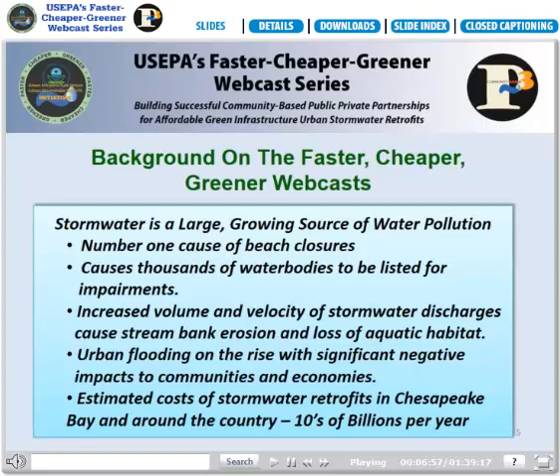Urban flooding — as we thaw out here in the Northeast, it's the first thing that comes to mind, the flooding that we can expect with this spring. It is on the rise with significant negative impacts, as many of us know, to communities and economies. And, of course, the estimated costs of stormwater retrofits in the Chesapeake Bay alone, here in the Mid-Atlantic, and around the country, we know to be in the tens of billions of dollars per year.

But let's flip that problem around and look at it as the growing industry and opportunity that it presents for us from an economic standpoint. This problem, as we're seeing in cities like Philadelphia that have adopted these approaches, is driving new green solutions and, in fact, a growing green market.

Traditional approaches for treating stormwater runoff have not worked. They've essentially created the challenges we have today, or haven't been able to address the emerging problems. Growing local mandates for governments to accelerate implementation of stormwater control measures are happening across the country. Many communities are opting for more affordable green infrastructure practices designed to not only treat and prevent stormwater runoff pollution, but also assist with mitigating floods, addressing water demand, and mitigating urban heat island impacts, which gets into public health and climate, focus on resilient communities, and providing other multiple community benefits.

This leads us to why EPA and many of our partners have begun to look at an area that, I must mention, public-private partnerships have been around. Actually, they've been around before the 'people, planet, profit' idea. Someone commented on a last webcast, 'hey, why'd you guys pick P3?' It's already out there. They've actually been around for quite some time.

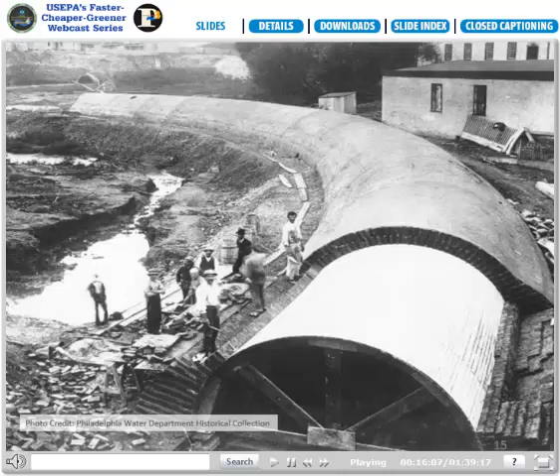This is how we did it. To the left of these men, with the new sewer going in in 1877, is the Mill Creek. As you can see, there's not much flow in there, because there's not much flow needed for this great big sewer except when it rains. When it rains, this thing fills up real quick, and that's when we have our problems. In the past it wasn't a problem because it just discharged to the river, and no one really cared about that at the time.

Today we really care. We recognize that we're having overflows from every one of our combined sewers, and we're looking to minimize that and put an end to it. In order to do that, we have to deal with an awful lot of water.

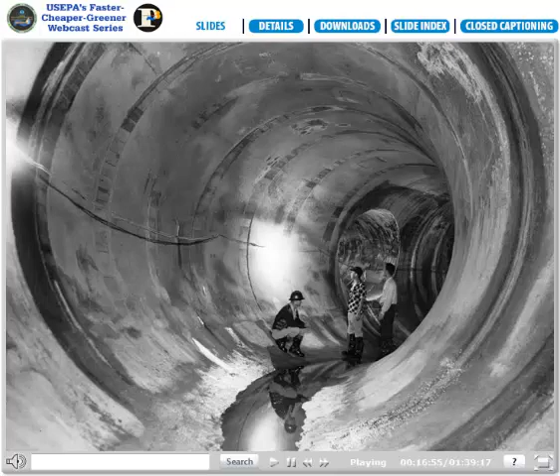This is an interceptor sewer that captures all the sanitary waste from our sewers and brings it to our wastewater treatment plants for treatment. However, when it rains, we have too much water and it goes out our outfalls. This is our largest outfall, called T14, well named. People are standing there because it's not raining, so it's dry, and all the flow is going to the wastewater treatment plant. When it rains, this thing can fill up about two-thirds to three-quarters of the way full pretty quickly, which gives you an idea of how much water we're talking about. This is our largest, but we have 164 of these CSO overflow points in our city.

This is a picture of South Philadelphia. Not the entire city looks like this, but it gives you an idea of the amount of infrastructure we're dealing with, and the amount of buildings and impervious cover we have in our city.

It's interesting to note that over the last 200 years, every square foot of this city, as it was built, and much of it today as it is being built, is designed on a slope, to allow rainwater to get to a storm inlet as quickly as possible. That's true for our roofs, our roof leaders, our sidewalks, our backyards, our streets. Everything is designed to bring water away from people, away from nature, into a sewer, and out into our river as quickly as possible.

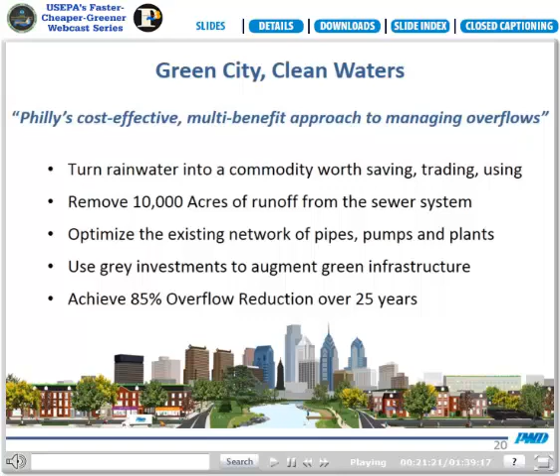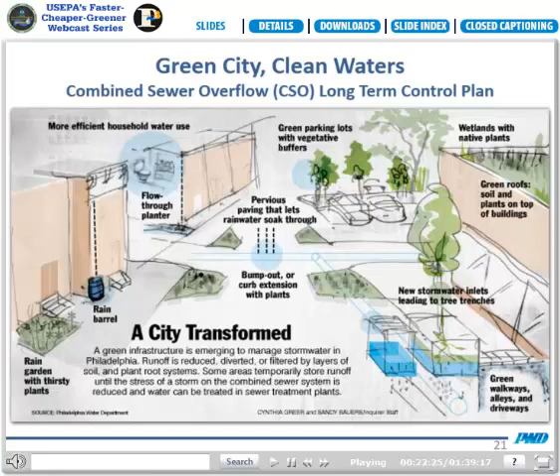What we recognize is that as Philadelphia grows into the future and becomes a more sustainable city, that only benefits the water utility. Anything the water utility can do to support the city in bringing in additional middle-class people and jobs, increasing property value and making it a better place to live, that only helps our bottom line here in Philadelphia, because we're spending close to $1 billion a year on capital and O&M. In order for us to sustain that into the future, we need a city that can afford its water utility. To do that, we're looking at working together to make Philadelphia a beautiful city.

So we need 10,000 acres. Where do we look? Well, we use the concept of One Water, One City, Many Places. We look at every square foot of the city of Philadelphia - the neighborhoods and communities, the transit systems and roadways, rivers and streams, parks, schools, streets, businesses, parking lots, universities. Most of the time we just put the word green in front of those words, and then we have a program - a Green Streets program, Green Schools program. We're working in all these different areas in order to create momentum, create energy, create designs that work and are affordable to manage our 10,000 acres.

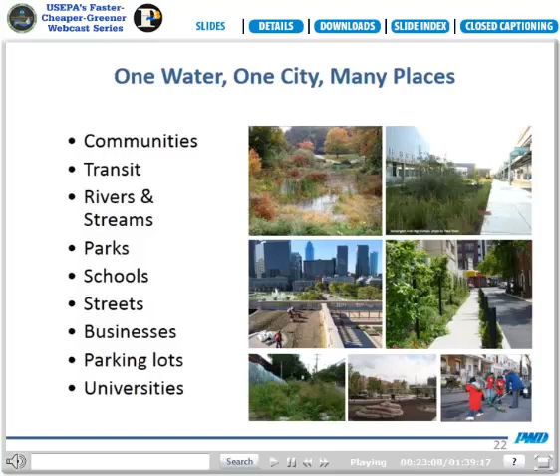This work largely came out of our long-term control plan for our combined sewer overflow. We've been working on that since the 90s, and in the early years of the 2000s we were working closely with EPA and the state to understand how we could convert a CSO long-term control program into a green program - sort of what you're seeing today. The way we found we were able to do it is we partnered - with groups like NRDC, Sierra Club, and Clean Water Action, and we worked with other foundations and other groups with the state and EPA, really trying to figure out how we could do this.

How can you convert a city? How could you basically change the slope of a city, and do it in a way that's fast enough and large enough that it makes a difference and achieves the goals that you're trying to achieve.

We began in 2011 with a consent order and agreement with the state, and followed that a year later with a landmark partnership agreement and administrative order with the USEPA to do the program that we're showing you today.

This is really the base of everything. This is removing 10,000 acres of runoff from the sewer system. We call an acre that's removed a greened acre. A greened acre is equal to basically 1 acre of impervious cover, capturing the first 1-inch storm from that. We call that a greened acre.

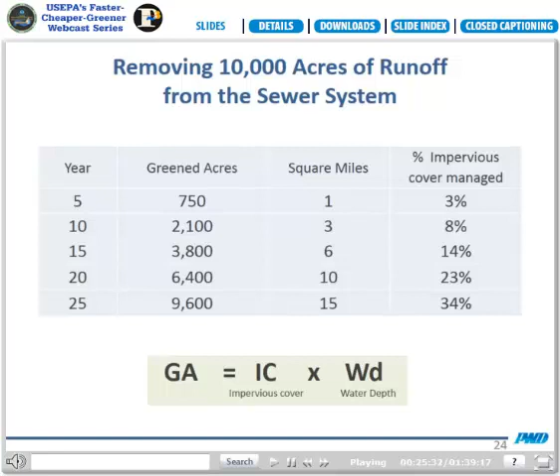But basically, what we're finding, and it's right now right at the top of our list, is the issue of extreme weather and climate change, where we don't know whether what we're witnessing is actual climate change at this point in time in Philadelphia. But I can tell you one thing: it's certainly extreme weather. Having the green infrastructure and the resilience from green infrastructure is really beneficial to our overall program for storm flood relief, for combined sewer overflows, for MS4 management, and for basically managing all our water systems in Philadelphia.

We're also obviously looking towards providing green open space and advancing livability and the public health of our city, increasing the market values and attractiveness of our neighborhoods, and reducing stream pollutant loads, which of course is the bottom line here of why we're in this in the first place, and creating this local green economy.

I'll talk a little bit more about that later. We're supporting urban renewal, enhancing the infrastructure network, and I can't underline enough how important that is—the importance of the existing infrastructure and maintaining that system and building on that system, and advancing the overall citywide sustainability programs, not only advancing them but also coordinating with them.

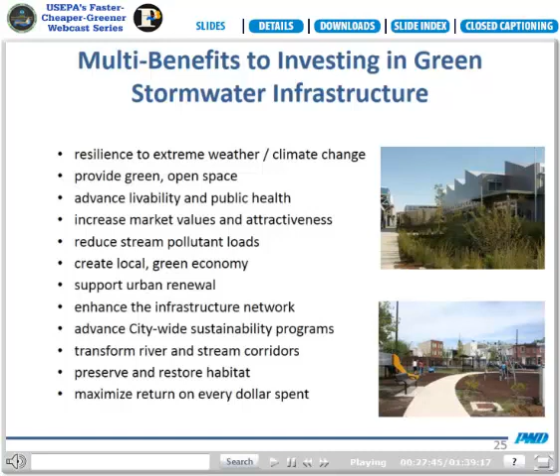Okay, we're now going to talk a little bit about the different financing opportunities. You can take a quick peek of where we're headed in this presentation. I'm going to talk about the traditional financing, and then I'm going to turn it over to Erin to talk about some of the other programs that we have.

Basically, traditional financing for green infrastructure is using our public investment, but using it above ground instead of below ground. We like to think about taking the $1 billion of sewer tunnel costs and bringing that to the surface and managing the same type of capacity, but doing it in a way that also benefits the city.

We're in this mode now. We're in the early years, about 2.5 years into our program, and we're innovating and demonstrating on public lands and streets, and we're setting aside money for 40 years worth of maintenance costs, looking to partner with other parties to do that maintenance.

We're looking again, for the traditional financing for green infrastructure, at the traditional funding sources using our revenue bonds, operating funds, working capital, and state revolving funds. We're also looking, and this gets to be really important here, at this public leveraging of sites, projects, and funds, and coordinating and integrating capital programs.

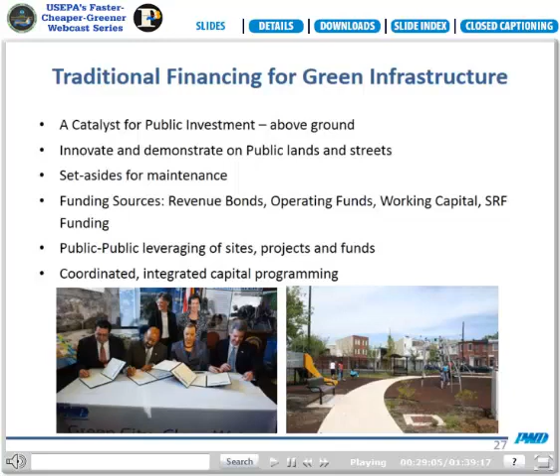I'm going to step through that a little bit closer because I can't tell you how important that piece is. What we find is that if you go out on Market Street and you do a design to green the street, the cost is pretty high. I think you all know that.

The concept here is, how do you do projects, how do you coordinate the rebuilding, the evolution of a city over time? How do you marginalize the green infrastructure costs into a redesign and rebuild of a city over 25 years? We have created a Green Streets Manual. I'll show you a couple of pictures from it in a minute. Basically, looking at when we do water and sewer reconstruction and other public works projects in the streetway, how do we return that street into a green street?

Whether that's done by the water department doing water and sewer work, or whether it's being done by PennDOT or someone else, it's all the same thing. How do we move a street as we're redeveloping into green streets?

At the same time, we're looking at our schools, parks, universities, and hospitals, which are four areas of growth in the city of Philadelphia at this time, and looking at a lot of change that's happening on those sites, and looking to partner with the school district, with the Fairmount Park system, with the University of Pennsylvania, Temple University, Drexel University, and hospitals throughout the Philadelphia area to do green infrastructure and demonstration projects and support them as they redevelop and rebuild their facilities.

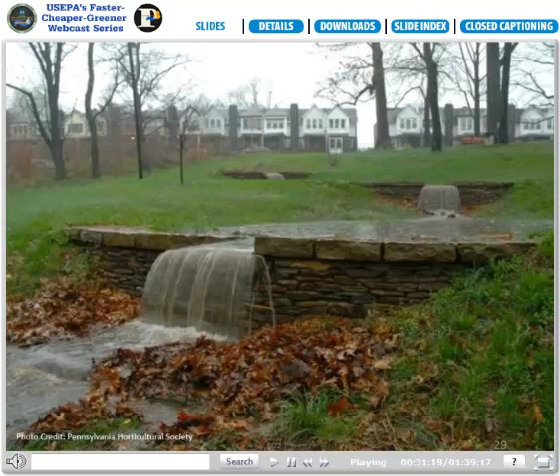This is a relatively simple but beautiful example of what we've done. This is a little stream that we created in a park with waterfalls and a bridge. Actually, it is diverting the runoff from the street rather than going into the sewer and into the Wingohocking Creek. The water is being diverted, going through a small filtering device, and then making its way down through this park in a beautiful setting.

What's not shown here is the small wetlands that was created at the bottom of this hill. Really, just taking a very simple project, fairly inexpensive, and beautifying the city, creating something new and something that's a little bit more exciting.

We're also using money from PennVest, which is our state revolving fund here. We have a $30 million PennVest loan that we got in 2009. It obviously was early on in our system, in our process, and we were rushing through a number of projects. We ended up doing 93 that are now completed or in design, 200 blocks of green streets, 90 greened acres.

From that we've created this Green Streets Manual, and we've been holding workshops for contractors because part of the issue here is not only do we not know how to make water run downhill, but we also don't know how to build it and maintain it. So while we're going through this process, we're bringing in the contractors who have been working for many, many years digging up the streets of Philadelphia and getting advice from them on how we would build the green infrastructure components.

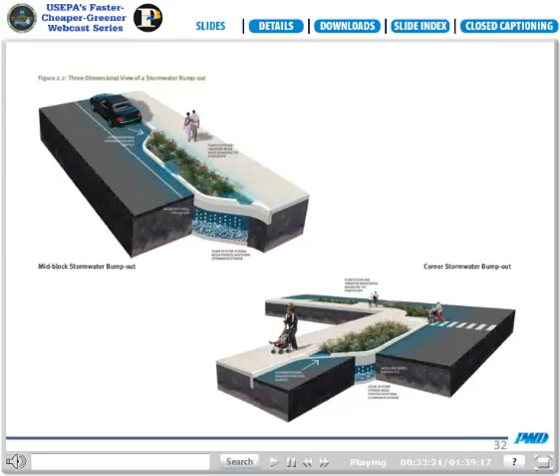The whole idea here, again, is that this is a whole new business about how to infiltrate water into the ground in an urban setting, an impervious covered setting on busy urban streets. But it is not an impossible task. It's not an impossibly expensive task. It just has to be done right and coordinated, and we have to get designs that are inexpensive to put in, that can be operated and maintained in a fairly efficient way, and can still look good 40 years from now.

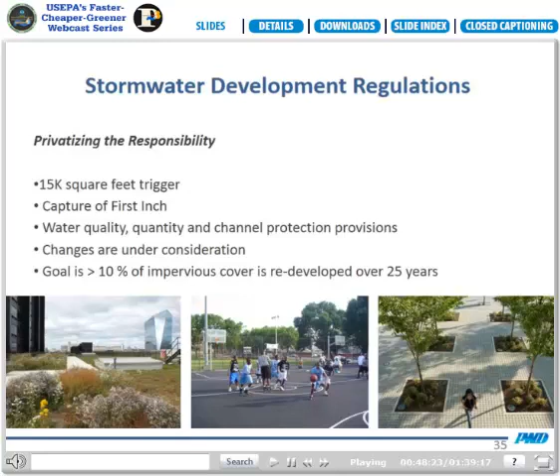Since 2006, we've seen about 500 development projects be approved and constructed. That's equating to 1.5 billion gallons of rainfall that's being managed, being kept out of our sewer system. So again, I want to reinforce how important these development regulations are to Green City Clean Waters and our overall program goals.

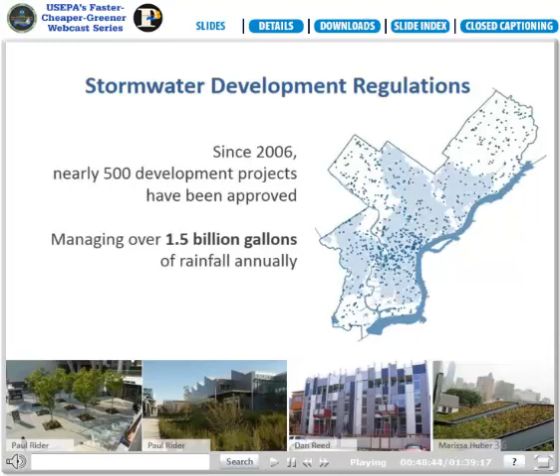Next I really want to jump into our parcel-based billing program, our stormwater billing program that went into effect a few years ago. The water department has been charging for stormwater for many decades, since about the 60s.

Historically we charged for stormwater based on the meter size for a particular property. However, in the 90s we were petitioned by many of our customers to explore a new way to bill for stormwater. What came out of that process, engaging with a lot of those customers, was a movement to bill based on a parcel-based method, meaning we charge all of our customers in the city for stormwater based on parcel characteristics, since that's more accurate in terms of the amount of stormwater shed from a property. The meter-based method worked for the time it was in effect, but it was just the most accurate way we could measure at the time. When we had better technology, beginning in the 90s and 2000s, it allowed us to move to this parcel-based fee recovery, which has really set the foundation for a lot of the incentive programs I'll be talking about in a few minutes. This movement to a parcel-based fee was really driven by being more fair and accurate in terms of our stormwater fee recovery, but also to encourage stormwater management through our credits program.

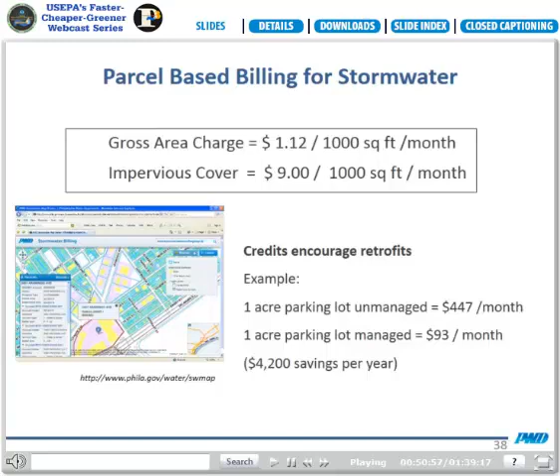So now we're going to get into some of the incentives that really help customers move forward with these projects and get the credits that they're seeking.

What we've seen with our credits program is that while the return in savings is great, retrofit economics just aren't where they need to be for customers to move forward on their own. These projects tend to be very expensive, and many commercial customers in the city don't have the available capital to get them going. This prompted the Water Department to explore grant programs and incentive-based programs to help customers build stormwater management and achieve credits against their bill, while also helping us manage stormwater. It's really the ultimate win-win—we help our customer base, and all the projects are designed in accordance with our Green City Clean Water goals, achieving green acres.

We launched our SMIP grant program a few years ago in 2012. Shortly after, we also launched a Business Improvement District grant, recognizing that we have these legally authorized entities or districts in the city, bound together legally. We recognized that stormwater management can often be achieved most cost-effectively at a larger scale, so these grants provide money to business improvement districts to start feasibility studies on how stormwater management can be managed most cost-effectively throughout the BID.

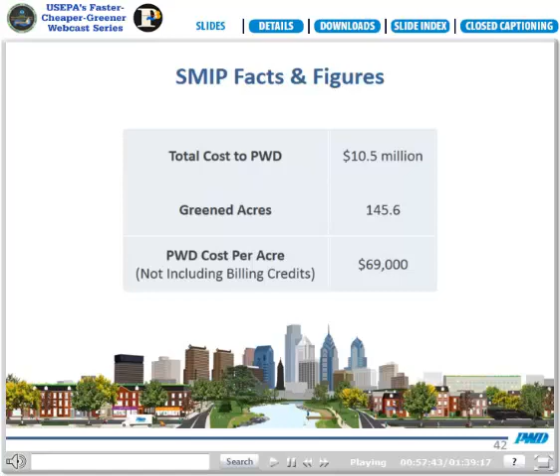So on the horizon, given how successful our SMIP program has been, we're really looking to capitalize on the strengths of that program. What we're seeing is that cost-effective stormwater management is happening at a larger scale. So how can we make that happen best, and what kind of vehicle can we offer that really capitalizes on those cost efficiencies?

That's what I'm talking about with the SMIP expansion program. This program is still in the works, and it will really resemble a pay-for-performance style contract, or the P4P that Dominique mentioned before. We're looking to provide more money for this program, not only soliciting applications competitively, but also trying to target properties and work with them up front, to really make this more of a partnership. This is something we're looking to roll out next fiscal year.

We're really excited. These kinds of projects we're looking at are multi-acre, 10 acres plus, 20 acres, even 50 acres. The SMIP grant program is targeted for private property owners, and most properties in Philadelphia tend to be relatively small. Many of the parcels we've received in applications are 5 acres or less. So this expansion program is really targeted at larger properties, or larger properties bundled together into one big package that we'll be able to fund via a grant. We're anticipating cost per acre as low as $80,000 to $90,000 per acre. We're really excited about what this is going to look like, and we're basically in the planning process right now, looking to roll out next fiscal year.

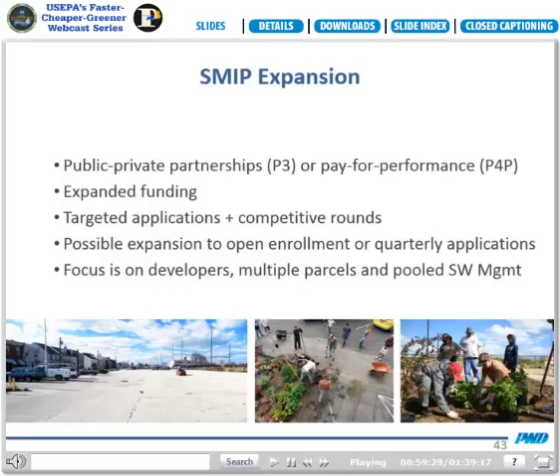Now moving on to some of the work we're doing on the residential side. The first two programs were mostly focused on our commercial customers, but we're doing a lot of work with residential properties too, recognizing that residential properties in the city account for a good chunk of the impervious cover, about 20%. So any stormwater management we can get on our residential properties is great.

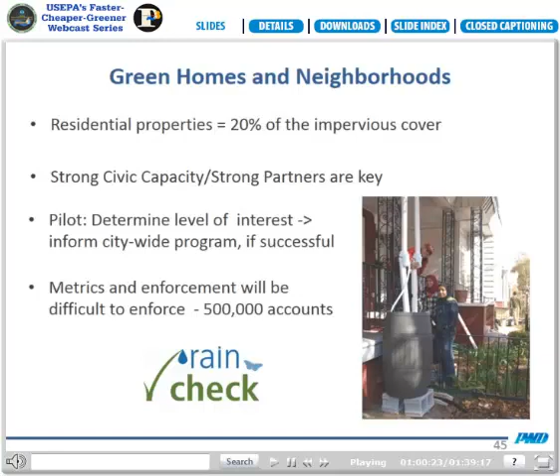But I think more importantly, out of these programs, we're looking for partnership and awareness, engaging the community to help Philadelphia as a whole understand that stormwater is a problem and really get their buy-in about Green City, Clean Waters. We've piloted a residential stormwater management program called Rain Check, where we go out and audit properties, providing funding or subsidies to property owners who wish to install stormwater tools.

As you can see here, these are some of the tools we're looking to install on residential properties. They're easily replicable and easy to maintain. These are the things we want homeowners to understand — we don't want them to be scared by this. We want them to understand it and then be able to spread the word.

We also have a Soak It Up adoption program, providing money to civic groups so they can maintain and care for stormwater BMPs. We really want to engage local community and civic groups to help us manage stormwater. We can't do it alone — we have to engage our citizens.

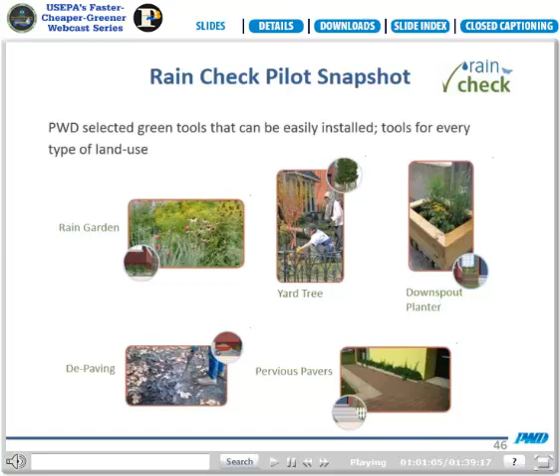Another program I want to talk about is our Stormwater Planning District program. This is an in-house program. It resembles the SMIP grant I talked about before, but this one is PWD driven. It's a planning effort led in-house, and it's really the same theme I've been talking about earlier.

We're capitalizing on cost efficiencies gained when you do projects at scale, surveying our CSO district in the city for large chunks of land, 10 acres or more, where multiple partners or programs can be amassed into a high-level stormwater plan. We've awarded 6 contracts to date, totaling around $1.2 million, and 3 are key right now: we're looking at the stadiums down in South Philly, the Eagles, Sixers, and Phillies, and what we can do with the vast areas of parking and impervious cover, since the runoff from that area is huge.

So what can we do down there to cost effectively manage stormwater runoff? We're also looking at the American Street corridor, an interesting one in that it's an old industrial corridor in the city that's now being revitalized. The roadway is very wide for Philadelphia, and there's a ton of businesses and some vacant land. It seems like a great project to see a variety of potential stormwater solutions. How do we use the vacant land, if at all? Can we use the street? Can we use the private property?

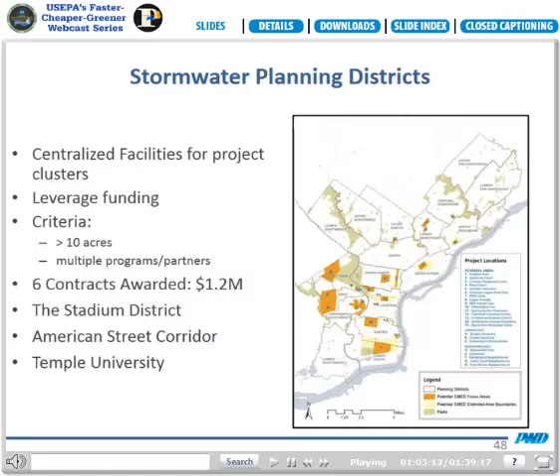Here's a question on the SMIP grant: is it funded with only stormwater fee revenues? Yes, it is. Currently, our SMIP grant program is funded from our operating budget.

What's roughly the minimum and maximum per grant? It really varies—that $100,000 per acre threshold really drives the amount of funding eligible for a particular project. We see projects as small as a quarter acre, or even smaller, eligible for a commensurate amount of funding, so you're looking at $25,000 or $20,000. We've seen projects as large as 50 acres receiving a few million dollars. So the range is pretty great.

We really try to tailor the program to be flexible, because we understand there are many customers impacted by our parcel-based fee who are motivated to install stormwater management practices but just don't have the available capital. We want to assist as many of these property owners as possible, while using this program to help us meet our Green City Clean Waters goals.

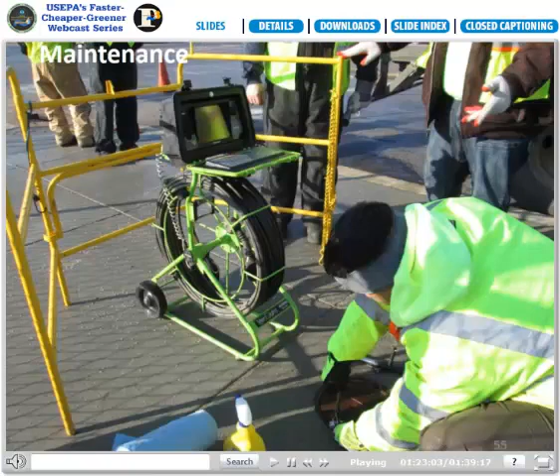But I want to leave you with this thought: it may be riskier to continue doing business as usual than it is to change. This is really hard stuff. Moving to green infrastructure looks great and it's pretty and it makes a lot of sense, but it is a hard thing to do, and I recognize that. Change is hard, but continuing the process we've been doing is really difficult in itself too.

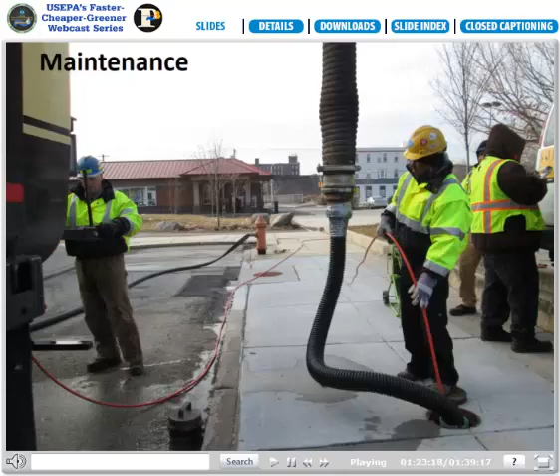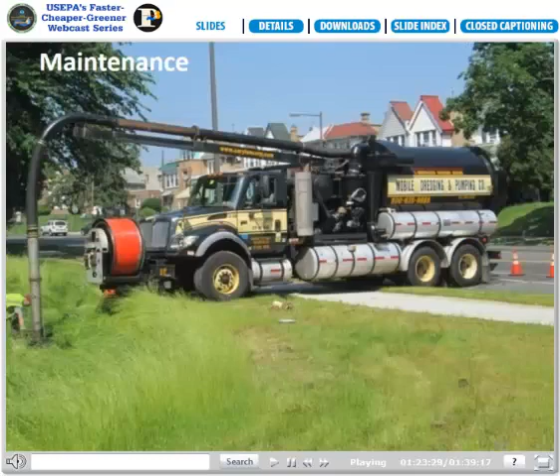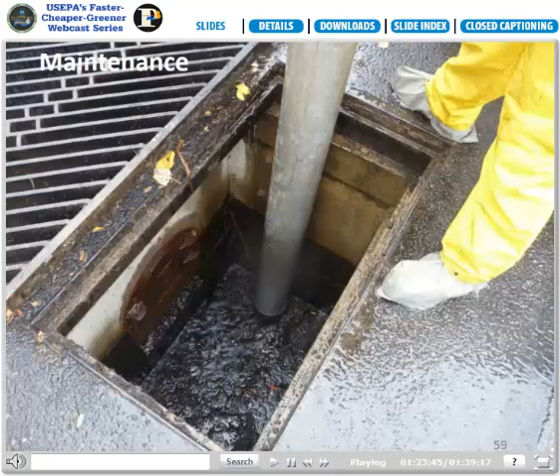Not as pretty when they're new. Here's what we call a green inlet, because we build this just upstream of the gray inlet, the usual inlet that takes water to our combined sewer. Instead, it captures the water first and then distributes it to a street tree trench or some other BMP.

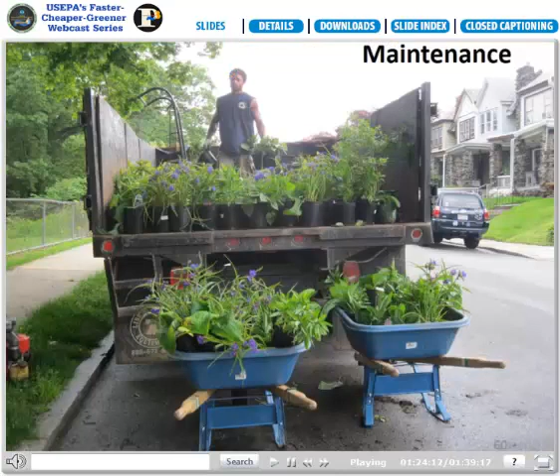Maintenance activities again, just involving local companies. I like that picture because it reminds me of spring. Yes, we're done with snow. So I have a few more pictures here I'm going to pass through.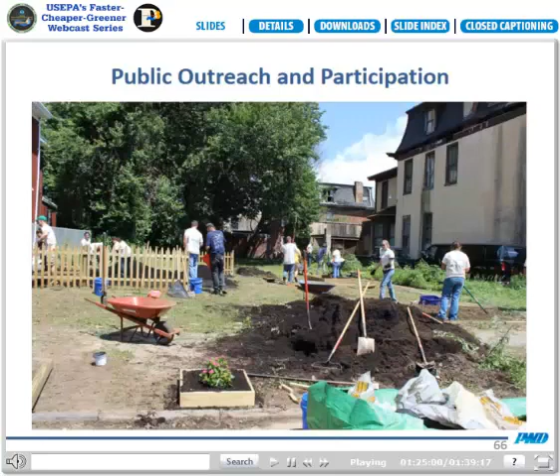Okay, great. And once again, we're getting comments that it's a great program, and we're certainly pleased that Philadelphia and a number of our other communities around the country are taking these perceived risks to provide answers, not only for Philly but for others - many communities out there that don't have the ability to pursue these types of solutions. So I want to thank you again for that.